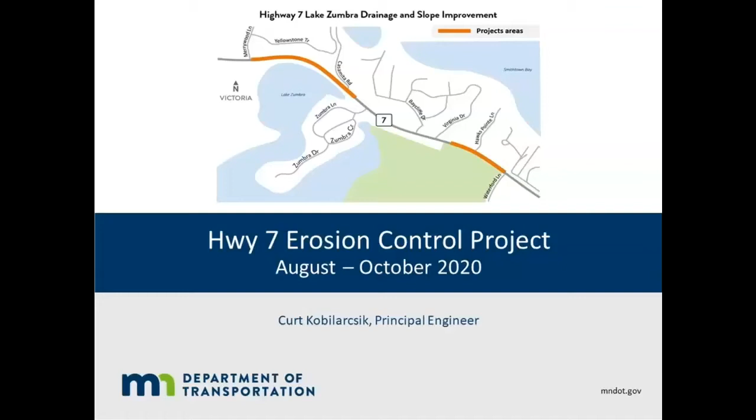First of all, project location. This project is located out in the Victoria, Minnetrista area at Lake Zumbra. There are actually two segments of Highway 7 that we will be improving the slopes at because of their past failures and their potential for future failures. The first segment is along Lake Zumbra, and that's going to be the focus of our discussion today because that's the most impactful part of the project. The second part of the project is at Hawks Point Lane, and we will be doing the same fix there as we are doing at Lake Zumbra. So keep that in mind as I'm running through the presentation.

So first off, a little bit about the project background. In this area, several slope failures have occurred along Highway 7. Many times we find out by getting contacted by local residents, which is great. It's really hard for us to see the actual failures, but with the storms and everything that have been increasing in the recent past, this is becoming a problem out here. What happens is the slope fails at one location, and after it fails, we send out the MnDOT maintenance forces. They go out there and fix it, adding big rocks and slope improvements to stabilize the slope. Then after that's repaired, the water just continues on and finds its next weakest link, and that erodes and causes the next slope failure. Then we go back out there, and so on and so forth. So it just continually keeps happening at this particular location.

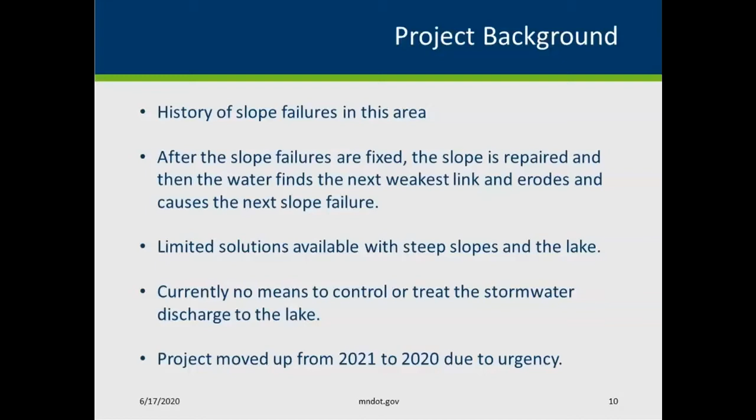Limited solutions are available, with the steep slopes along the lake being another concern. We looked at a lot of different solutions, but really there's only one that rose to the top, and I will walk through that with you quickly. Another aspect of this project is that currently there is no means to control or treat the stormwater that's leaving our roadway and entering the lake. So this is an opportunity for us to come in and do some improvements to that aspect of the area as well. This is an emergency project. We are moving this up from 2021 to 2020 due to this urgency. The frequency of these failures is increasing and increasing, so now is the time to get out there and take care of this. So here I wanted to show you, here's the existing highway, obviously.

What I want to show you here is that the road is tipped towards the lake, both lanes at this particular location. So there is no curb and gutter, there's nothing along the edge of that roadway. So all this water gathers together and flows across the highway.

Sometimes really quickly with the large storms that we have, and then it just batters the slope along Highway 7. You can see on the top here under the guardrail, this was a fix in the past. This is some of the large rock that we put out there to stabilize the slope. I wanted to show you what happens up there on top of the slope.

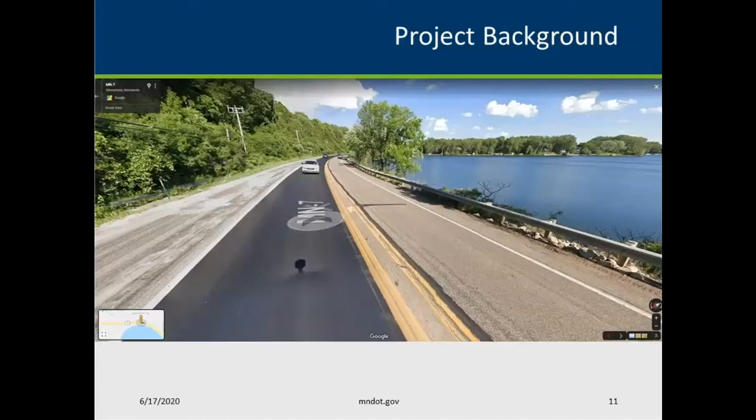Okay, here's the next slide. So what I wanted to show you here is, from the sky from Lake Zumbra looking to the north, you can see what's been happening out there. You can see that there are several areas of large rock that have been placed out there. So those are areas of failure that have happened in the past out there.

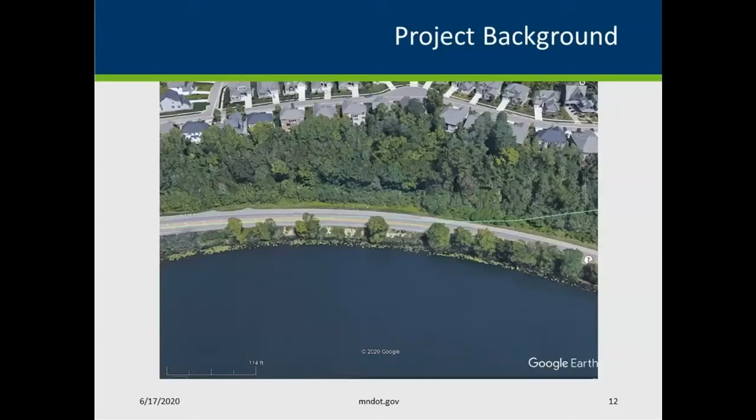And we see that as something that's going to continue in the future, so we really need to get out there and take care of this. This is a picture of a recent failure that's taken place out there. Not many of the drivers along Highway 7 are able to really kind of get the magnitude of the failures that we have out there.

So as mentioned, the water flows across the lake or across the roadway, and then right at the edge of the pavement, it just starts eroding. And then eventually the whole slope fails. It fails vertically right at the edge of our road. So you can see the road pavement is exposed, the guardrail posts are exposed as well, and that material dumps in the lake.

And then, as mentioned previously, we come out and we stabilize that with large rocks and other things as needed to keep our road safe.

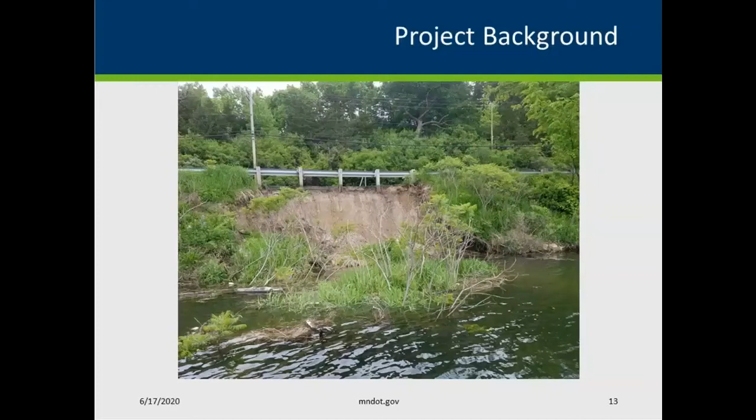So the solution, we've looked at many different options. Some were really just very impactful to the lake, honestly. We tried to find an option that was the right solution for us, that gave us a future for this roadway without failures, and just minimize the slopes to the lake and the impacts to the lake itself.

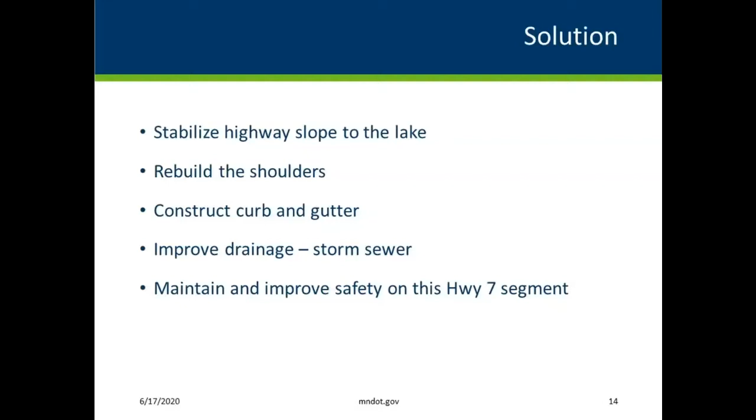So we're going to stabilize the highway slope to the lake. What we're going to do is rebuild the shoulder that's out there today. It's a little 4-foot shoulder. We'll take that off, construct some storm sewer, curb and gutter, repave the shoulder, and this will help to maintain and improve the safety on this segment of Highway 7 into the future.

Here's just a quick graphic of our solution. So if you look up in the upper left there, you'll see a 12-foot through lane. So picture yourself in a car driving into your monitor where it says 12-foot through lane, and then you're looking out to the right as you're driving along eastbound Highway 7, and you have a little 4-foot shoulder there, you have a guardrail, and then you have the really steep slope down to the lake, and then you have Lake Zumbra down at the bottom.

As I mentioned, we looked at a lot of different things, a lot of different options. A lot of these options got into the slope quite a bit, and we got into the lake as well. So really there are a lot of the slope areas along that lake that are in good shape. It's not like the entire area is failing out there. It's just these really specific locations that have failed because of erosion.

So what we're doing is we're going to come in and put curb and gutter up at the top of the slope. So you can see the curb and gutter shown there. And then we're going to have the guardrail as well. So we're going to try to keep the impacts at the top of the slope. There will be times when we have to go down further into the slope, but we're trying to minimize impacts to the trees as well, because we know that that is a buffer to the lake as well.

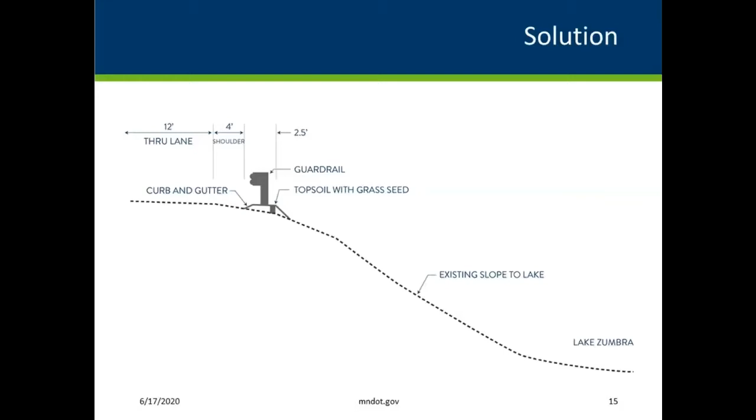Just a little bit about the project schedule.

Back in March, because of different environmental restrictions, we needed a separate contract to remove the trees required for the project. Those trees removed at that time are the ones needed for our project. We had to remove several trees and branches that would impact the construction equipment and our highway. Also during this time, we've had initial meetings with cities and emergency responders, so they're up to speed on our project and comfortable with the solution we've proposed.

In April, we like to go out in person and present to you folks directly, going through all the details so you can ask us questions individually. We'd planned this open house to take place at Charlson Meadows, but obviously we got caught up in COVID-19, and now we're going through this. This was one of the first few presentations we've done virtually.

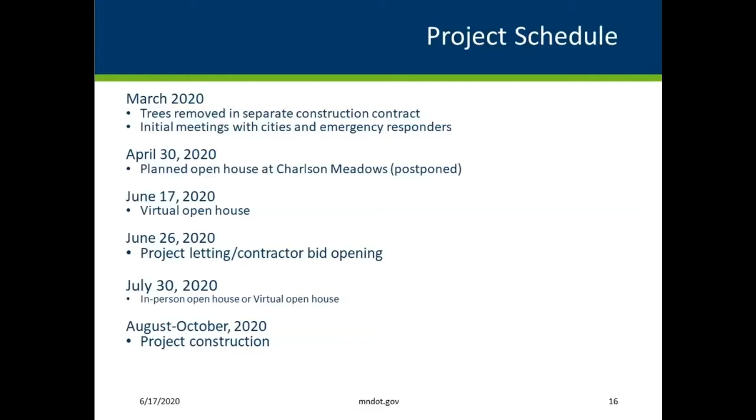I wanted to touch on some of the environmental considerations we are doing with this project. As mentioned, curb and gutter will help reduce slope erosion up on top and help control where the stormwater goes. This final solution minimizes impacts to the lake shore. We don't anticipate going down into the lake except at possibly 3 locations where we need to replace existing culverts and their aprons currently in the lake, which we'll upgrade to much newer, improved aprons. We've also minimized tree removals along there.

Back to the storm sewer for a second - currently the water runs off the road straight into the lake with no way of controlling it; it just erodes dirt and heads into the lake. We're going to collect that through a storm sewer that takes it to drainage structures. Within those structures, there'll be sediment devices so contaminants can be contained before entering the lake. There's another device included that'll collect floatable debris before it's transported to the lake. We look at this as a nice improvement along this lake shore.

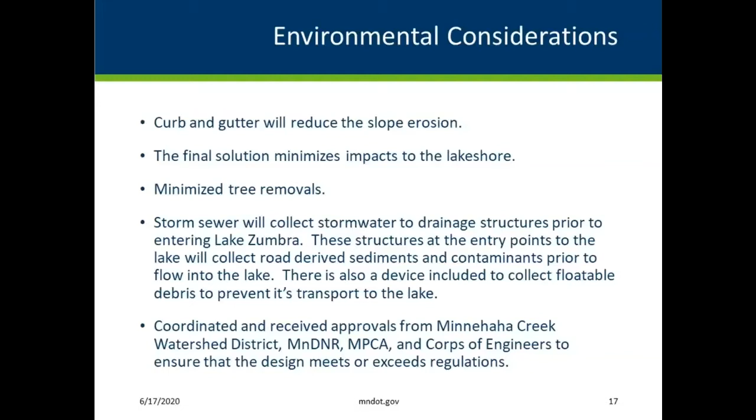Since we're adjacent to Lake Zumbra, or any lake for that matter, there's a lot of coordination involved in delivering these projects - with the number of organizations and agencies we work through. We coordinated and received approvals from the Minnehaha Creek Watershed District, the Minnesota DNR, Minnesota Pollution Control Agency, and the Army Corps of Engineers, to ensure the design meets or exceeds regulations. We've received all proper approvals from all those agencies, and we are now ready to go.

As we start walking through the construction activities and staging, in early August we will start construction. The first activity out there will be shifting traffic to the south a bit, and we'll reconstruct the north shoulder of the road.

Because what's going to happen is once that's beefed up—it's not thick enough to carry highway traffic right now—we need to replace that with a much thicker pavement section. So that will carry westbound traffic during construction.

There will be 2 weekend full closures in August to construct the culvert crossings. As I mentioned, we have about 3 culvert crossings that will be taking water and discharging into Lake Zumbra. We do need to shut down the entire highway for that activity.

With this project, we tried really hard to keep as much open as we could. For a while there, we were going to have to shut down the whole highway to do this work. But we kept at it, kept working with our functional groups within MnDOT, and we came up with a solution that's going to minimize traffic impact as best we can.

So we are going to keep westbound Highway 7 open to traffic during construction, with no impacts except for those 2 weekend closures. The one big change for drivers out there is we do need to close eastbound Highway 7 to traffic and follow a detour down to Highway 5. I will show a graphic for that.

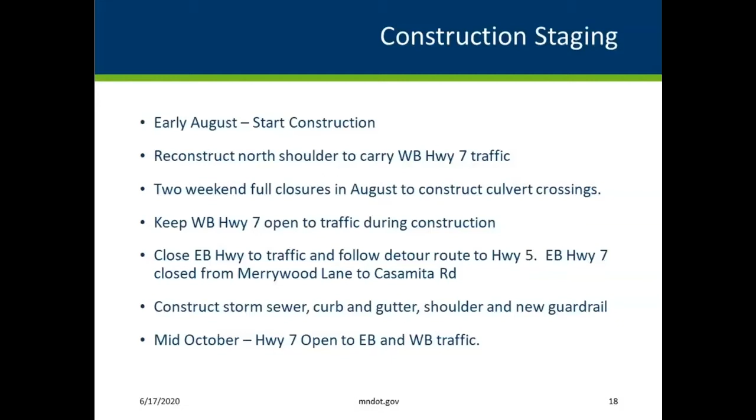Mid-October, we'd anticipate Highway 7 opening to eastbound and westbound traffic. So eastbound traffic will be closed for approximately 2 months during construction.

All right, so here's our detour map. If you're coming from the west on Highway 7 heading into the cities, you're going to come to that roundabout at Victoria Drive. At that roundabout, you will take a right and head down Carver County 11. We've done a lot of coordination with Carver County and had agreements in place to make sure we're able to use their county road for our Highway 7 eastbound traffic.

That traffic will go past Carver Park Reserve and come into Victoria on the west side at the Dairy Queen. As part of this project, we are going to have a temporary traffic signal at that location because of the increased traffic numbers on Highway 7.

Highway 7 has about 15,000 vehicles per day, roughly. There's 7,000 eastbound vehicles per day. So those vehicles will be finding a different route past Lake Zumbra.

You'll come in on Highway 5 and take a left and go through downtown Victoria and continue on, and the signing will take you past Rolling Acres Road, past Minnewashta Parkway, past the Arboretum, into Chanhassen, and then take a left onto Highway 41, and that'll take you back up to Highway 7.

It is anticipated that a lot of that traffic may just continue on Highway 5. Once you're on Highway 5, depending where you're going, it may just be easier at that point in time to continue on Highway 5 in towards the city.

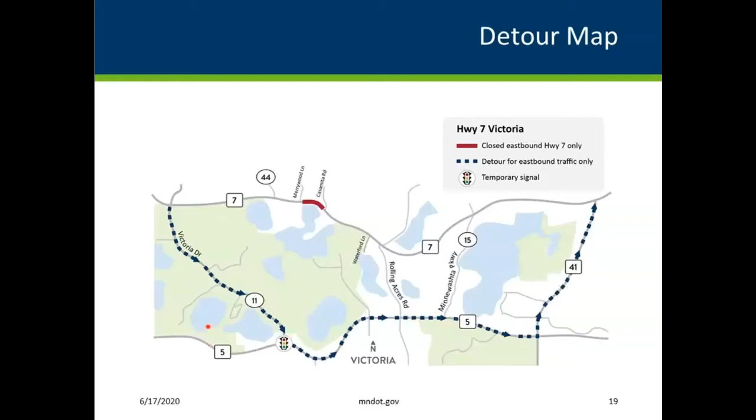So this is kind of a busy drawing, but what I wanted to show here was the full detour. My cursor is at the roundabout on Highway 7, and you'll travel south down to Highway 5 and then continue on to the east.

What I wanted to show here was that there really aren't a lot of options for detours, unfortunately. You have Lake Minnetonka on the north—there really isn't a road that we can detour traffic up there. And then to the south, it's a combination of county highway and MnDOT trunk highway for our detour route.

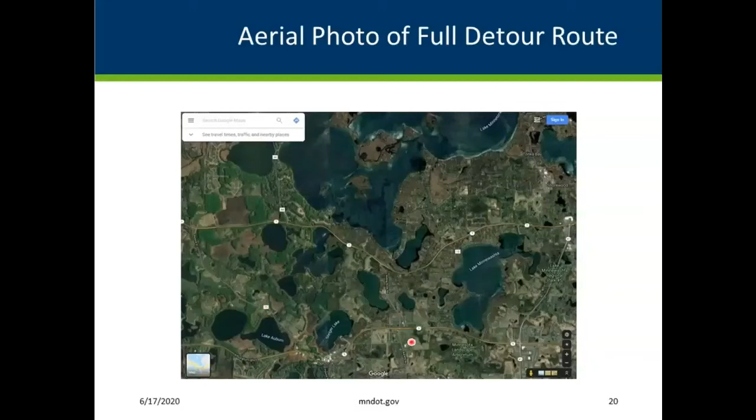So I zoomed in a little bit here because I just want to show some of the access points currently out there that may or may not be impacted by the project. For example, if you're going to Lake Minnetonka Regional Park coming south on Hennepin County Road 44, you're not going to be able to take a left to go into the city. You're going to have to take a right, go up to the roundabout, and follow the detour.

That's going to be the same for Charlson Meadows—same thing, because the road is going to be fully closed from Merrywood all the way to Casamita as far as eastbound Highway 7.

So at Merrywood, you're not going to be able to take a left to go into the city. You'll have to take a right and then find another route, or follow the posted detour to get into the city. Now for those residents that live on the east side, such as Casamita Road, Zumbra Drive, Bay Cliff, Virginia Drive, you'll have the same access that you have today out there. You'll have full access, you can go to the right, you can go to the left, eastbound or westbound on Highway 7.

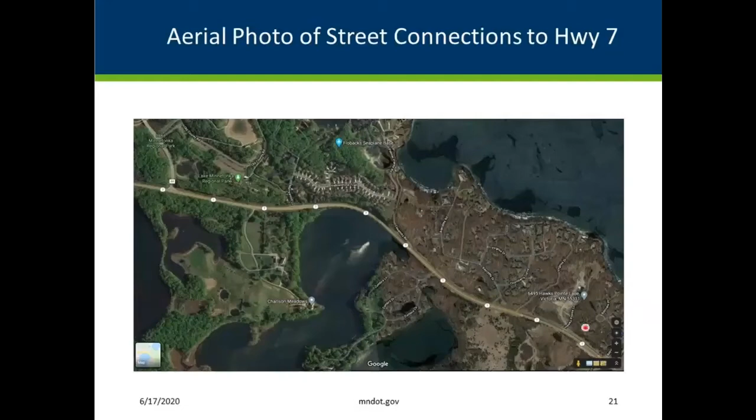You can see Hawks Point is down here in the lower right corner, that's the other portion of our project. I don't want to forget about little Hawks Point over here. We are not closing Highway 7 at Hawks Point. There is enough width in that road that we're able to get traffic through without shutting it down, so really no impacts over there at Hawks Point.

So some of the traffic impacts I want to summarize with you. I just went through some of them, but there's no safe way to keep Highway 7 open during construction. As I mentioned, we were going to have to close the whole thing at one point in time, but we were able to change that through a lot of discussions internally. The posted highway detour will use Victoria Drive to Highway 5 to 41, with a temp signal at Dairy Queen.

Two weekend full closures, we touched on that. All these accesses you see here, Zumbra Drive, Casamita, Bay Cliff, Virginia, will be open to access as they are today. Merrywood Lane just will not be able to take a left to go out of the neighborhood. Residents and emergency services will have full access at all times during construction. That's something that's standard for all of our projects.

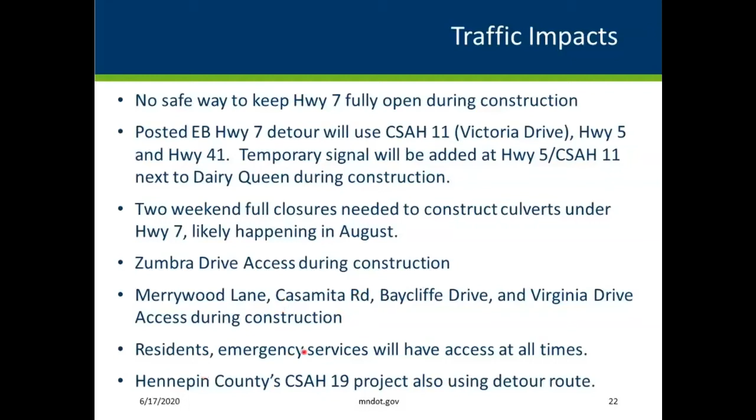One thing to note, as you're probably aware, Hennepin County's County Road 19, the Narrows Bridge, is being reconstructed this summer. That project is currently using Highway 7 as its detour route, so it will not be completed by the time that we shut down eastbound Highway 7. Their detour will be using our detour for 2 or 3 weeks, I think, is what's planned. So there will be some impacts with that.

And that covers the information that I wanted to cover. I will turn it over to Christine now for the next portion of the presentation. Hello, and thank you, Kurt.